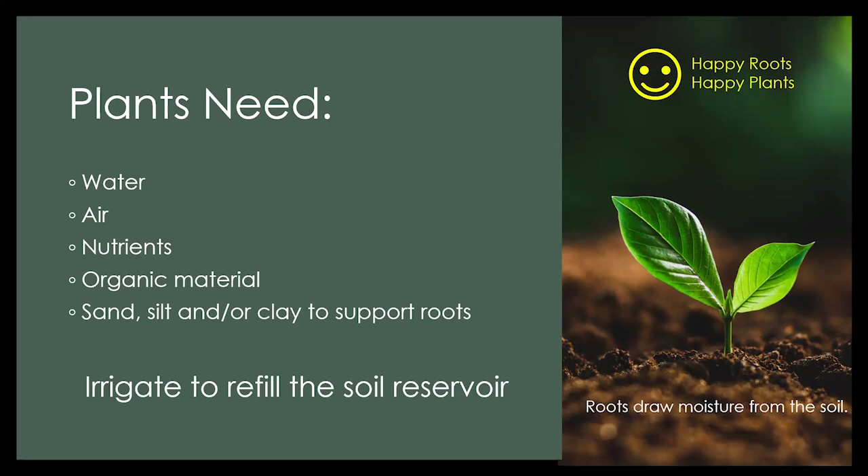Our job as irrigators is to refill that soil reservoir. Too many times people think, oh yeah, the dirt's fine, I got the hose out and I watered, but if you water for just a couple of minutes, you get the top wet, but you've got to think deeper, because those roots are down deep. When you have a deep, healthy root system, that plant is going to thrive. And that's the whole point of having a landscape - make it beautiful and make sure it gets the resources it needs to thrive. Here's an odd place to start, but I think it's an important place to start.

We're taught about hydrozoning as landscape designers, where we're grouping plants that have similar water needs together. Once they've been grouped, it's time to irrigate those. How do we irrigate them? We have to consider what that group looks like, the plant type, the exposure, the application rate of the sprinklers. Each hydrozone will have different watering requirements, so let's make sure we understand how those requirements affect our decisions relative to hydrozones.

The soil is a reservoir, and that's where the plants get their water from. But that soil reservoir, as all reservoirs do, has a capacity, based on the soil type and the rooting depth.

I like to use the example of a glass with ice in it and a straw. The ice represents the soil particles. If you fill that glass up, how much water can you get out of the glass? It really depends on how far you put the straw in. If the straw only goes down an inch, you're not going to get a whole lot of water out of that glass.

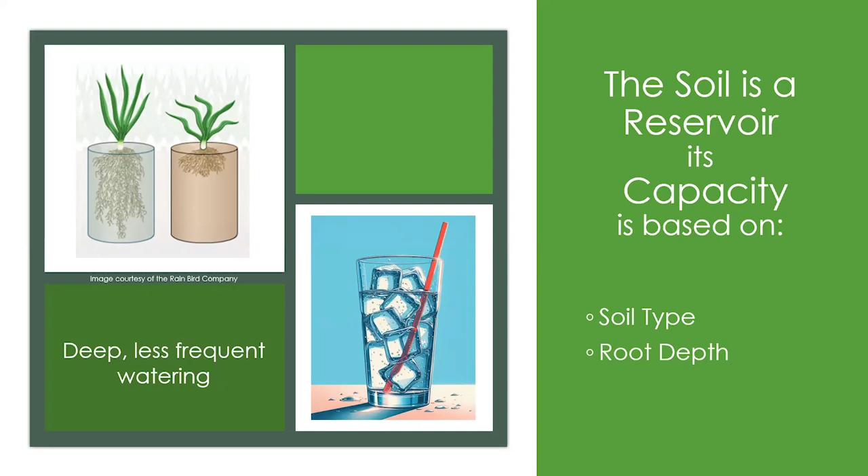Another point essential to understand is the balance between air and water in the soil. The organics and minerals make up a portion of the soil, but then you've got the pore space, and that's never going to be exactly 25% air and 25% water. It's going to be changing. It's dynamic. The more water we put on the ground, the less air that's in the soil, and vice versa.

And as you water deep and less frequent, what happens? Water drives out the air, but as the soil begins to dry out, air is drawn back into the soil. It's almost like a natural respiration process, where watering is an exhale, and then as it dries out, the air is drawn into the soil.

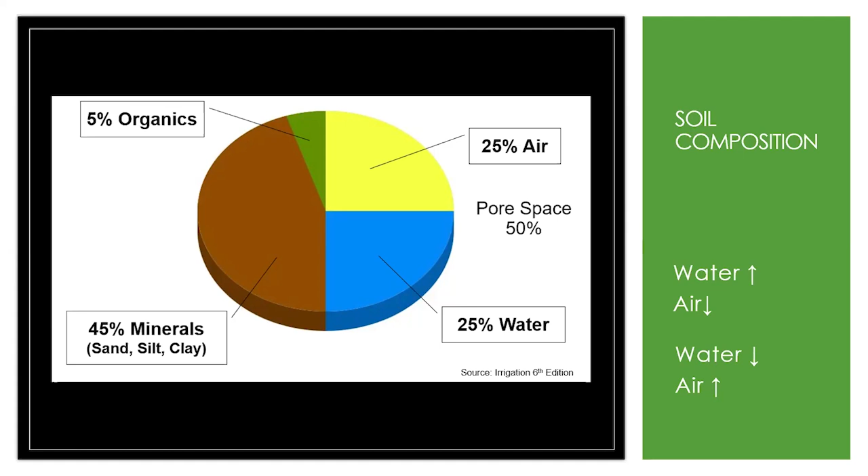That's an important thing to remember, the importance of a healthy balance between water and air in the soil. Now, as an irrigation manager, you need to really understand soil moisture content. I think we can all visualize bone dry, no water at all in the ground. Plants are not going to survive, period.

Go to the other extreme and look at a saturated condition. In a saturated condition, all the pore spaces are completely filled with water. There's no air, and that's not healthy at all for the plants. In a saturated condition, the water begins to drain as a result of gravity. When drainage stops, the soil moisture content is considered to be at field capacity.

Field capacity is like a sponge. You put a sponge in a bucket of water and squeeze out all of the air, pull it out, and the water begins to drip off that sponge. When it stops dripping, that sponge, or the soil, is at field capacity. But if you squeeze the sponge, you still get lots of water out of it. So at field capacity, there's still plenty of water in the soil.

To make sure we have a good balance of air and water, we allow the soil moisture to deplete, not to a wilt point, but about halfway. The industry refers to this as MAD, managed allowed depletion. As a general rule, 50% allowed depletion is a good target, but that's a fuzzy line, not an absolute, because you still have water at 60% and 70% depletion, but it's tougher for the plant to get at, and you're going to begin to reach a stress point.

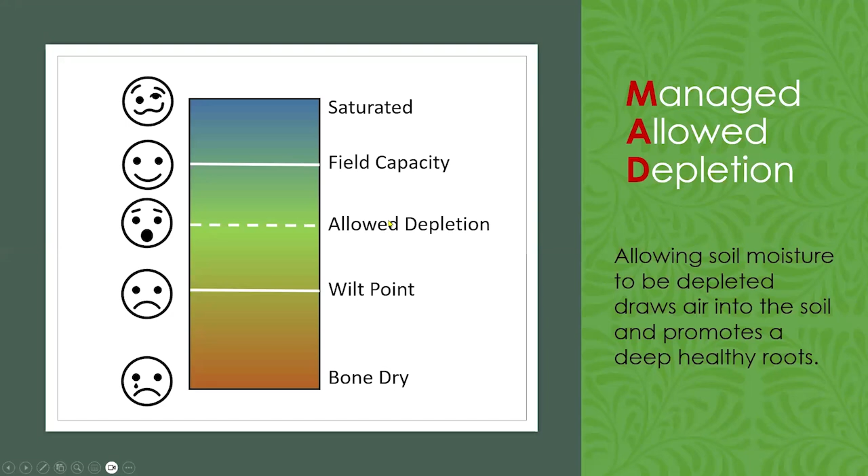So we irrigate to allow depletion and then restore it back to field capacity. With that in mind, what causes depletion? You're going to see how all of this begins to tie together relative to hydrozones. Depletion is a result of evaporation and transpiration.

The industry refers to the big word ET, or evapotranspiration. It's the loss of water from the soil through evaporation and the loss of water through transpiration. Transpiration is the water that evaporates through a leaf.

There are principally four climate elements that drive evaporation or ET. Solar energy is the biggest energy source that causes evaporation, changing that liquid into a vapor. Temperature is a second. Wind accelerates evaporation because once you've turned it into vapor and blown it away, you're replacing it with drier air, just like a hairdryer.

Humidity will influence the rate of evaporation. In a very dry climate, it's very easy for water to evaporate. It doesn't take as much energy as when the air is already loaded with water vapor. That's why it's easy to dry clothes out in Arizona as opposed to New England, where it's much more humid. So all of those are the factors that drive evaporation and transpiration, or ET.

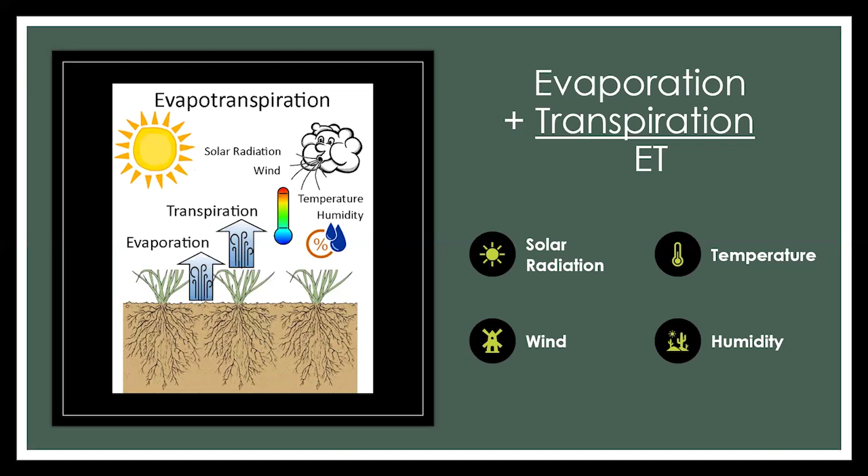There's a difference between actual evaporation and what the industry refers to as the potential for evaporation. The potential for evaporation says I look at all of those conditions and can estimate how much water evaporated if that water is there. To actually measure the real evapotranspiration is very costly and is specific to every single location within a landscape. So we need to depend on an estimate.

We can go to the Utah State Division of Water Resources website at conservewater.utah.gov and look at the information there. They have weather stations throughout the state taking these measurements and calculating an ET value, presenting it as today, the last 7 days, or even yesterday. You can see there's some differences, and that's expected. There's also a lawn watering guide that tells you how often you should be watering by county. That's some good, helpful information.

But all of that is driven based on ET and the potential for evaporation. Transpiration is not always exactly what we expect because plants resist evaporation, and different plant types resist evaporation differently. A cactus, at the extreme, is going to hold on to that water as much as it possibly can, and so are many of our desert plants in Utah. They resist evaporation.

Whereas a turf grass is going to freely evaporate. As soon as we throw mulch over the soil, we have protected the ground against the evaporative source energies. Shade decreases those evaporative influences. If we can put the roots down deep, that water is not subject to the same evaporative forces.

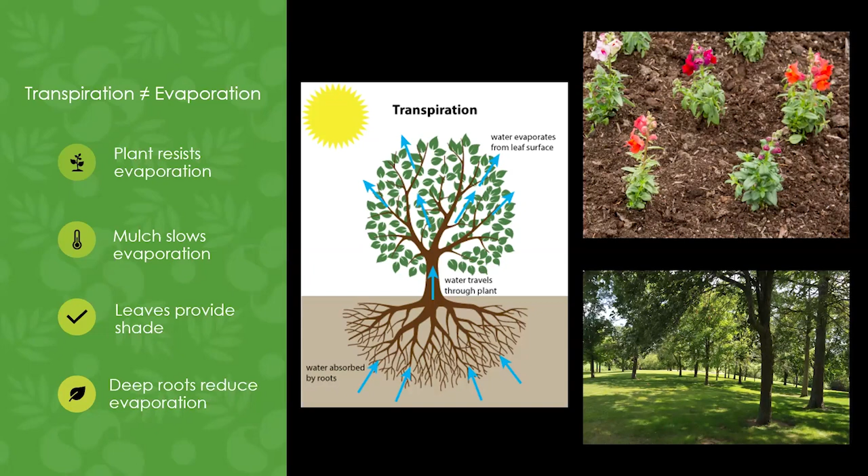Now that we understand ET and the fact that the environment or the plants affect the rate of evaporation, we can apply what is referred to as ET coefficients, also called crop coefficients or plant factors. Here's where it all ties together: we don't put low water use plants in the same hydrozone as a cool season turf because their ET coefficients are different. That way we can manage the frequency of watering, understanding those plants use water differently. Rooting depth is another factor relative to hydrozoning, as we've already discussed.

Exposure is another factor to consider in hydrozoning, because in full sun conditions, it's going to dry out much faster than in shade or partial shade environments. So we keep our hydrozone respecting the plant differences, the rooting depth differences, and the exposure differences.

There's one other factor we mentioned regarding hydrozones: sprinklers apply water at different rates. Spray heads put down water extremely fast compared to drip systems, and rotors are a nice mid-range application rate. But those are also not exact.

Spray heads' application rate varies. Rotary streams and rotors vary. Drip systems can vary dramatically. So we make sure that the application rate within a hydrozone is kept the same. By having that uniformity within a zone, we can more accurately manage the irrigation schedule.

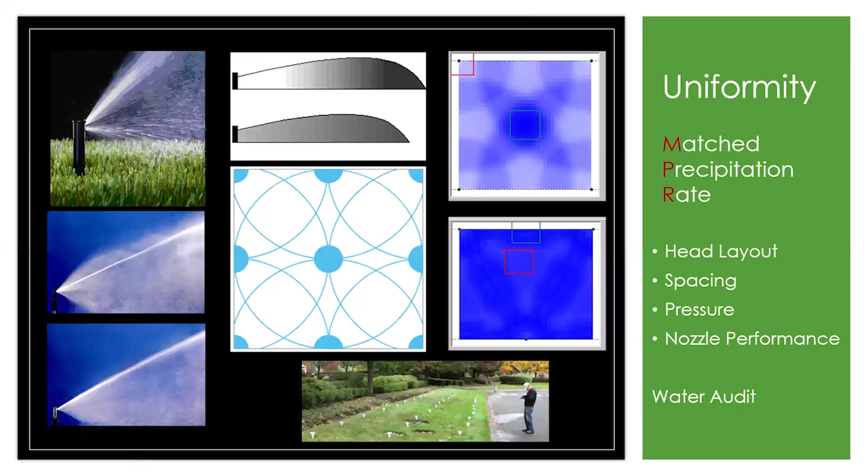Irrigation system components. We're going to walk through all of them, the basics, and just cover some key points that I think it's important for people to remember. Spray heads, everybody knows what spray heads are.

They're going to be great for turf and shrub areas and smaller areas. Many different nozzle patterns anywhere from full circle to variable arc, and a distance of throw from 5 to 15 feet. Lots of pop-up heights. There's a lot of architects that really push hard for a 6-inch pop-up even in turf, because you want that nozzle to be high enough above the grass blades so that it does not interfere with the spray pattern.

So if you're going to be on that higher mowing pattern, which is recommended, you may want to consider going into a 6-inch pop-up. Head-to-head spacing is going to be important. Matched precipitation is just inherent in the nozzle design. You've got a very broad range of flow rates, and so that has to be understood as you're creating your hydrozones.

The application rate with spray heads is high, 1.5 to 2 inches per hour. That's oftentimes faster than what the soil can absorb, so it's probably best to look at something else or go into a cycle and soak. Because of that, the cycle and soak is a good mitigating approach, but there are other lower precipitation rate options that I'm more in favor of in mid-size areas.

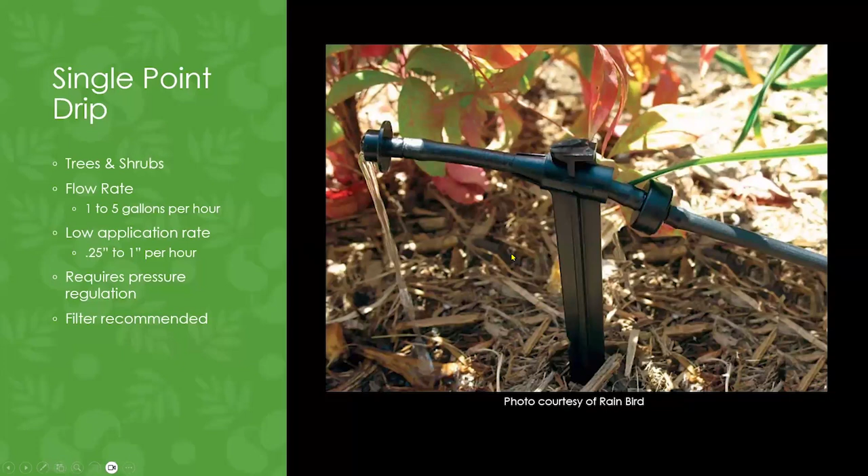Microsprays, there's some pros and cons to microsprays. Yes, it's a spray, so you've lost the benefit of having it deposited right at the base of the roots, or right at the base of the plant. But if you've got a bed with lots of plants in it, then maybe it's a good thing to just go ahead and spray it.

But these are on a fixed riser and they sit above the plants. They are very adjustable. They are small, but they are nevertheless subject to vandalism or damage. But microsprays may be a solution that some people haven't tried that I think does a nice job. I know I use them in my garden in a couple places.

Drip line has become very popular in the last couple decades, and there's some pros and cons to drip line. It's easy, but it's also a pain. The nice thing about it from a design standpoint is you just say, hey, yep, there's the zone that I need to water, and I put in my drip line and we're done.

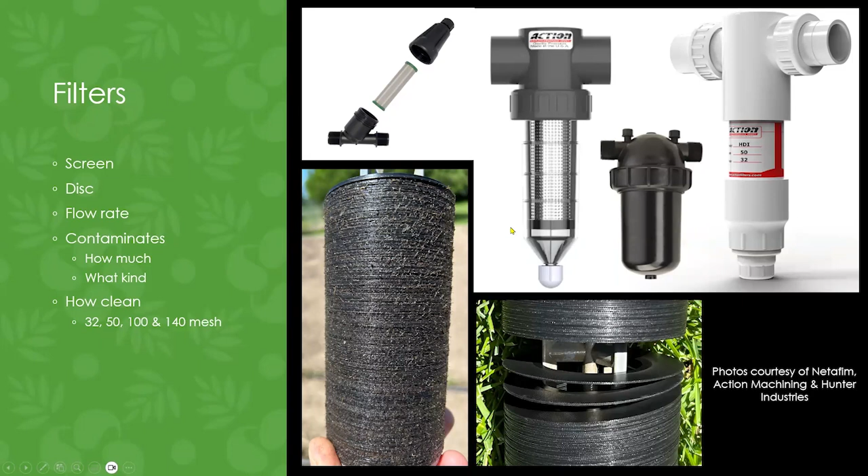When you're looking at filters, you want to look at what flow rate has to be supported by that filter, and how much contaminant you're expecting. You may have to oversize that filter because you're expecting a fairly high contaminant load. Then, how clean do you need that water? That's really based on what the sprinklers are. For spray heads, there's a debate between 32 mesh or 50 mesh. Drip is traditionally going to be 140 mesh. The higher the number, the smaller the holes within that filter.

Pipe just has to do its job. We've got two different types of piping systems generally within an irrigation system. Your main line, or pressure pipe, delivers water from your point of connection out to the individual zone valves. Then from the zone valves, you go through lateral piping. Generally, in the irrigation world, we're working with either PVC or polyethylene piping. Most of the time, I recommend Schedule 40 PVC up to 4-inch. You can see with this 1-inch pipe how much thicker that wall is on Schedule 40 than it is with a Class 200 pipe.

They're both going to hold the pressure, but that Class pipe in smaller diameters is just more subject to damage because it doesn't have the same mechanical strength that Schedule 40 does. Your polyethylene pipe, high density, is a black flexible pipe. The nice thing about it is you can snake it through, you don't have to have as straight trenches, and you don't have to worry about draining it in the wintertime, although some people do. Poly is becoming very popular for both main lines and lateral lines, although sometimes you'll see just PVC main lines with polyethylene laterals.

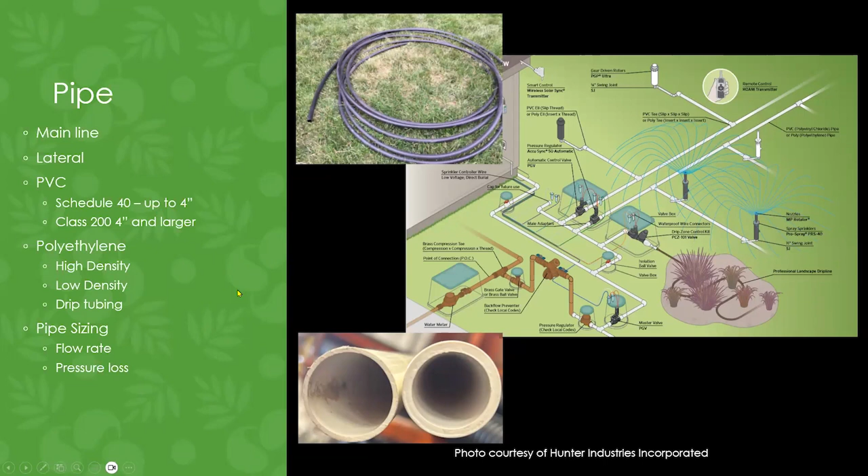The key thing to remember with piping is getting your pipe sizing correct. It's essential to count up the flow rate on each zone and make sure you don't exceed the hydraulic capacities of that pipe. If you push too much water through a pipe, you get too much pressure loss, and you end up with a big difference in pressure between the first head and the last head on a zone. So pipe sizing is all about supporting the pressure that those heads need to be uniform.

Every system's going to have some valves, and there are lots of different types that can be used. Let's start at the point of connection. You'll traditionally use a stop and waste valve, buried deep down at the same level as the water meter or the water line coming into the building. It's called a stop and waste because it stops the water, and wastes or drains the water on the downstream side of that valve when it's closed. So when you shut off the system in the fall, the water drains through that hole, and that's the first step in winterization.

And there may be other points on the main line or laterals that need to be drained as well, but that's the first point of connection valve that you're going to have to deal with.

Codes require that we have a backflow preventer, and there's really three flavors that we consider: reduced pressure type or RPs, pressure vacuum breakers or PVBs, or double checks or DCAs. The RP is the highest level of protection you can get. These do need to be installed above ground, but this is the best you can get in backflow, so you can protect against any contamination from the sprinkler system getting back to the culinary or potable water system.

Pressure vacuum breakers are good as well, but they have to be installed above the highest sprinkler. RPs, you don't have to worry about that. A good acceptable solution is double checks. They can be put into a valve box and do a good job. All of these have little test ports, and those should be tested on an annual basis.

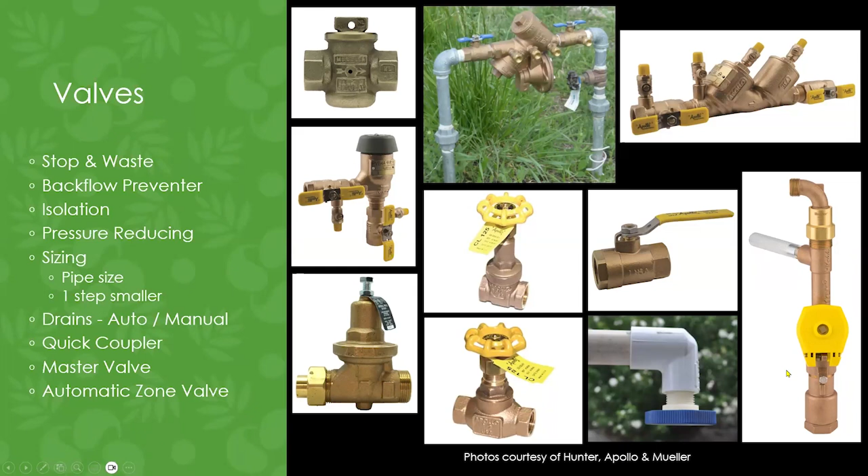Now let's take a look at the automatic valves and consider some of the things there that are essential to remember.

Automatic valves, the brass valves, that's traditional, but most people are using plastic, and plastic valves are great. You've got to think about the actuation, whether that's going to be a 24-volt AC circuit on the solenoid or a DC latching. The size of that valve is going to be based on the flow rate. If you put in a valve on a line that's going to be flowing lower than what the valve will support, it may not shut down. Most valves have a flow control that limits how far that diaphragm can open.

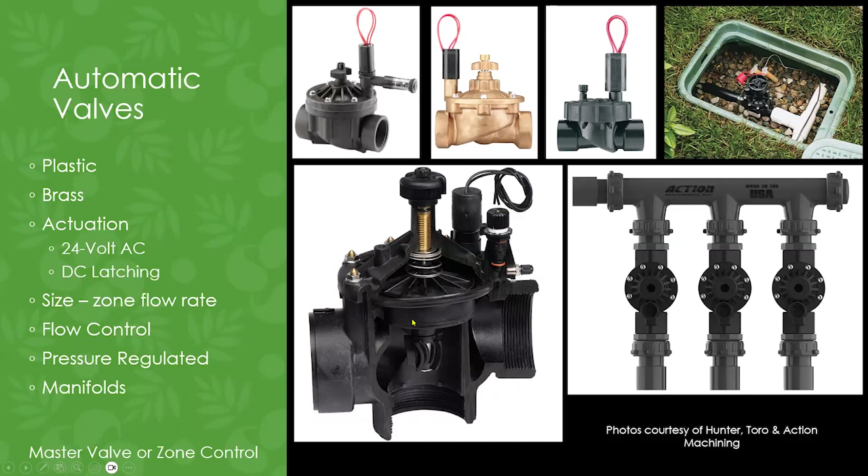It's a common accessory to put in a pressure regulator that can then modulate that diaphragm and control the pressure coming out of that valve. And again, I highly recommend pressure management.

Manifolds are just there to make it easier for you to service those valves. Having manifold systems are great - I really am a big fan. They've got unions on either side of the valve to be able to service those valves.

Decoders are becoming very popular. They just have a two-wire path that follows the main line to every single valve, and then you put in a decoder in the valve box, and the decoder may support one or up to four valves.

And they're addressable, so they have to be programmed. But it's a very simple way to add a valve or to be ready to support expansion on a site. Two-wire is becoming a very popular solution, particularly in commercial applications.

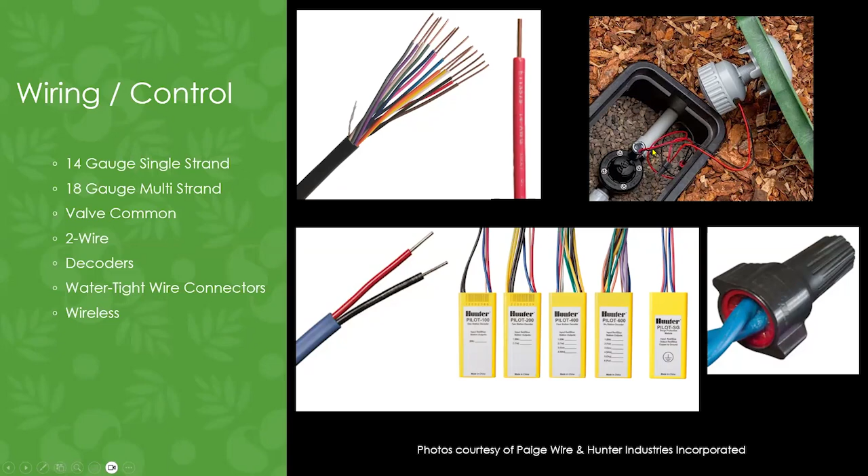Don't forget to use watertight wire connectors, please. That's just a must. We're seeing a trend toward more radio-controlled or wireless valves, where there's a transmitter at the controller that reaches out to the valve box and actuates that valve. So that's a handy solution.

I'm looking at the time. Am I in trouble here, Sethal? Oh goodness, no, we have 20 more minutes. Hey, I'm looking at the wrong timer. There we go, we're in good shape. I was looking at the timer on one screen and not the timer on my clock. We're good, okay, we're good. Good.

Okay, control systems. Here's my passion. I love control, I love smart control. I was involved with that for many years. In the early days we just used dumb timers, and they automatically wasted water because they were just not programmed very often. They were set and forgotten. Fortunately, we are pretty much away from dumb timers. Nobody should be buying a dumb timer anymore. You should be buying a smart controller.

Smart controllers are weather responsive, or they respond to soil moisture sensors. The EPA is now backing smart controllers by saying, here is a test protocol. If that manufacturer's product meets that test protocol, it gets the EPA WaterSense mark, which indicates that it is complying with that test protocol and is an efficient water management device. Most smart controllers too are tied to a smartphone app, which makes it really easy to turn things on and off or make changes to your schedule from your phone or wherever you may be. But the key thing is smart controllers are saving water and are doing a good job.

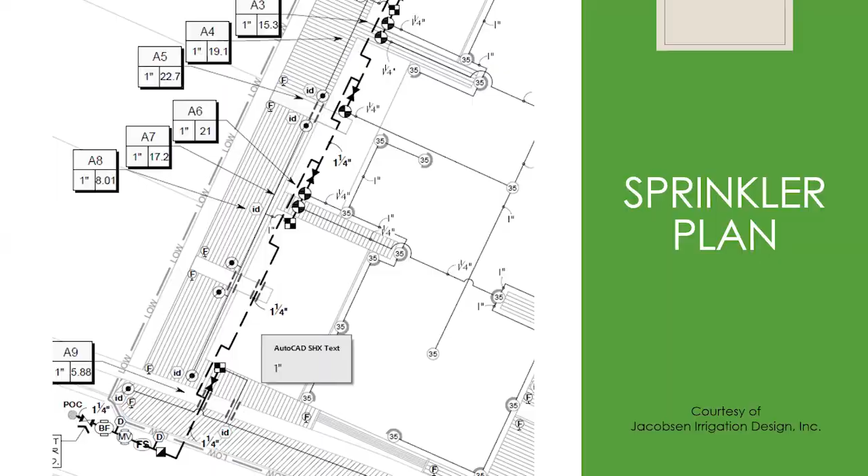And a good plan is obviously going to have its legend, and you can follow through that legend and learn what each one of those symbols is representing. So now if we go back to what we talked about in hydrozones, we talked earlier about the importance of hydrozones respecting or being divided based on plant type, exposure, and sprinkler application rates. So how does that all tie in?

Well, we have to control the frequency of water. We say deep and less frequent. Well, we have to control that frequency, and of course that's based on managed allowed depletion. We'll talk about that in more detail. But plant type is going to drive your rooting depth and your crop coefficient. It's going to be affecting your exposure, which is driving your frequency. So those are all related. Your zone runtime is related to that sprinkler application rate. So it begins to carry forward into more detail than just how we hydrozone.

It goes into the control side of watering that zone. Now, when we look at a smart controller, it's looking for some settings, and it's asking the question: what is that soil type? What is that root depth? And from there, it can determine how deep or how much water should be applied.

And then how long should those water runs be? Well, that's going to depend on how many inches we've got to apply and what the application rate is. And of course, uniformity has to be considered. So how much do we water? Root depth, soil type, how long, how quickly it applies, and what that uniformity is and how much we're trying to apply.

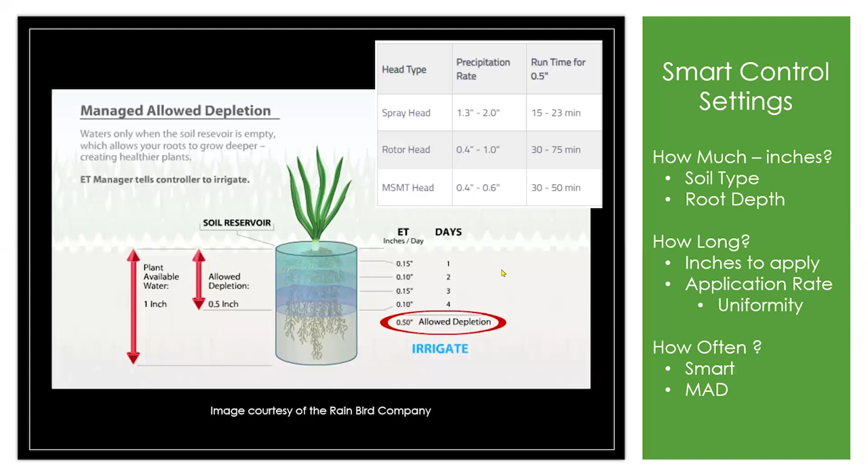Again, the half inch is a good target, but it's based on your soil type and the rooting depth of your plants. I know for myself at my home, my roots are down much deeper, and I'm watering about every 10 days on my turf here in Logan, Utah. So it really ties down to what is that root depth and the soil type.

The industry has an old expression called the ET checkbook. The newer term is a moisture balance system, and smart controllers use this approach. How does it work? Why do they call it the checkbook? Well, a checkbook's got withdrawals and deposits and balances.

What's a withdrawal from a checkbook, an ET checkbook? Well, it's ET, because that's evapotranspiration. It's a withdrawal, it's drawing things out of it, drawing water out of that soil moisture. A deposit's going to come from rain, and it's going to come from irrigation.

So in this case, on the first day, we had a little bit of a withdrawal of ET, and we had a little deposit coming from some rain, so we didn't need to irrigate. Then we get a little more ET, and it's finally time to irrigate. Here we get some rain. So in this case, the system is tracking that balance and deciding when and how much to irrigate based on this ET checkbook, or soil moisture balance method.

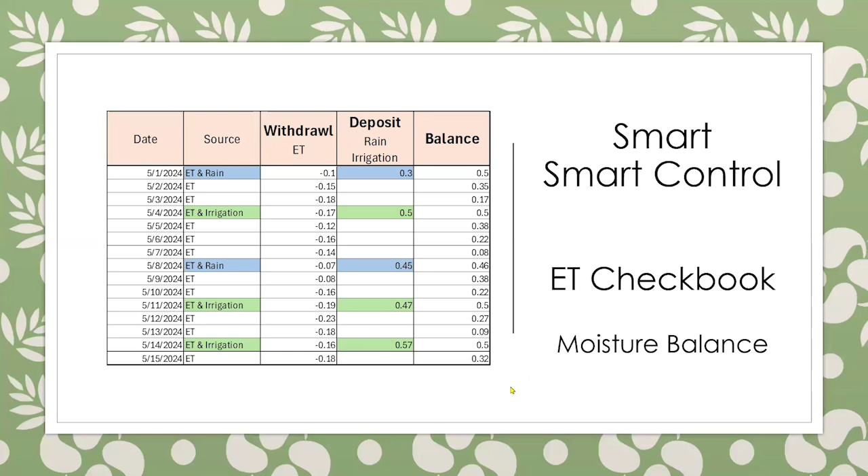To do it really right, you need not only an ET measurement, but you also need a rainfall measurement. This is one of the weaknesses of some of the smart controllers, is they don't always measure rainfall as accurately as they could be, because rain can be so variable in a given city.

One other point that I think is important to remember in setting up the control system is you want to reduce your runoff by cycling and soaking when the sprinklers are applying water faster than what the soil can absorb. You apply water just to the point where it's about to run off, then you stop and let it soak into the ground, and hit it again. That's the cycle and soak. I've seen that solve so many problems, and I'm a huge fan of cycle and soak.

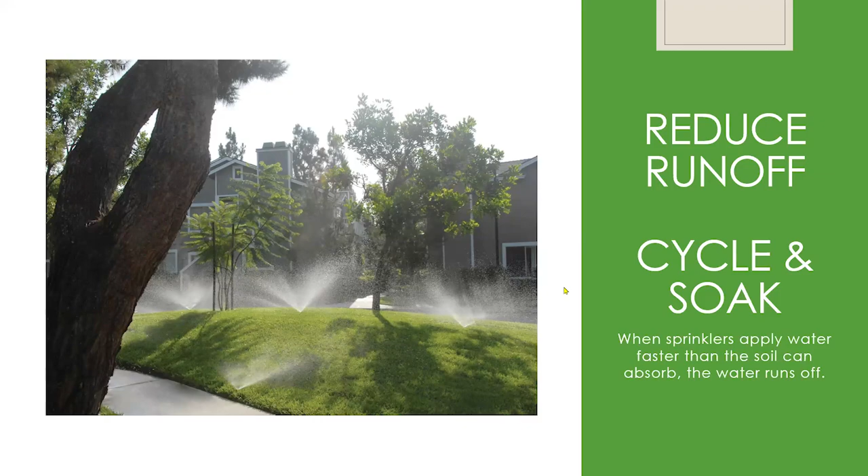Improving water use efficiency—this is going to be more of a review than anything, but the phone calls I would get were about dry spots. How do we solve those dry spots? Well, we're going to look at the heads. Always look at the heads when we're talking about dry spots—or maybe you're dealing with the soil condition.

But the pressure may be too high or too low. You may have the wrong nozzle. There may be some head adjustments that have to go along, or it may simply be a crooked sprinkler. Now, there's a big difference between a dry spot, a small area within a zone, and a dry zone. If the overall zone is not looking good, then you're probably dealing with a valve runtime issue.

Most likely that's the problem. It could be a watering frequency issue, but most of the time you would just need to increase that valve runtime. Now, if the entire site is running dry, then watering frequency is the issue. You're waiting too long to start watering.

Now we can flip these two around and look at the inverse. If I've got a wet zone, adjust my runtime or my frequency. If I've got a wet site, adjust your watering frequency.

Now, smart controllers use the weather to adjust those schedules. You start with an initial setting, but things can change. Roots can grow deeper, and so you can be changing those root depth settings and those crop coefficient settings over time.

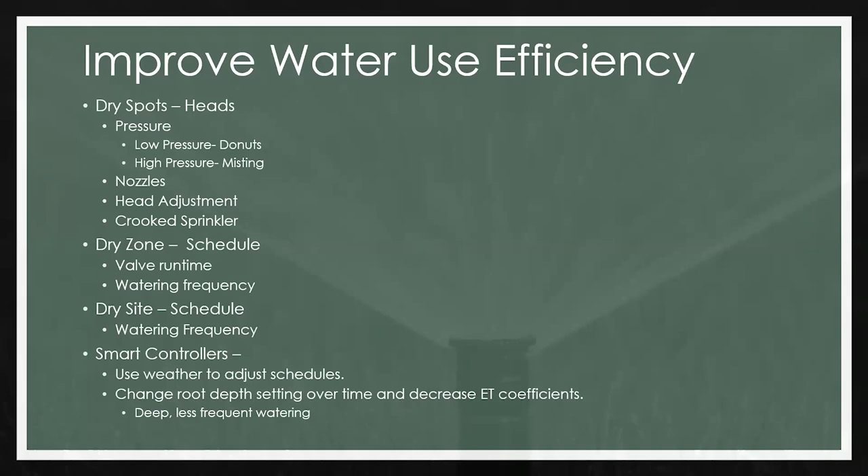Those are the points I wanted to make, and I'm ready for some questions, Chital.

Hey, I think I did pretty good. Look at that time. Yeah, you're right, right on time, and we had pretty good discussion in the chat section while you were teaching this. Thank you, everyone. Now we will move to our question sections. Let's move on to the questions.

Nancy Smith asks: you may answer going forward, but what does one do in an existing irrigated landscape that has spray heads for bedding plants and large pots within the same zone on drip? Obviously not ideal. I'm currently doing a longer drip main program of watering and then a second program with shorter irrigation time, more frequent days. Is this all I can do?

You want to take that? It's in the Q&A if you want to read it again. Yeah, let me read that again if you don't mind. You say it's in the Q&As, right?

Yeah, here. If she really wants to take it seriously, those wireless valves are a nice solution. That's an easy way to get that done because she's in a situation. This is why I was emphasizing hydrozones right out of the gate. She has essentially two hydrozones: she's got her bedding plants and she's got pots.

And the pots obviously are going to have a different watering requirement than plants that are in the ground. So if she's got a lot of them, it would make sense to put those on a separate valve. I don't know the details, but yeah, that would be one alternative.